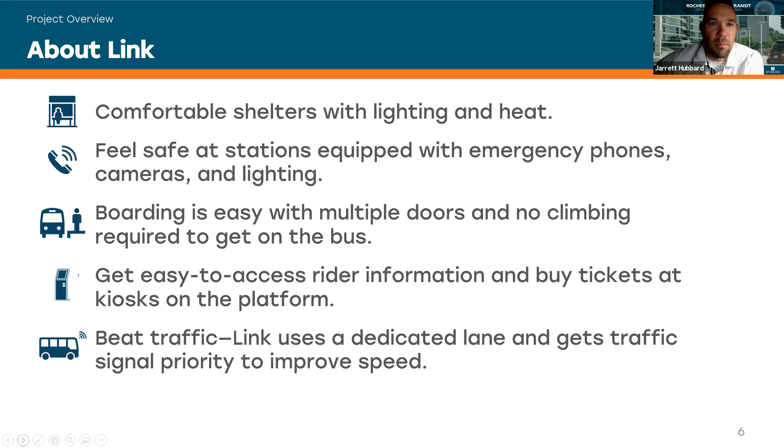Finally, Link Rapid Transit will use what's known as traffic signal priority, and that helps make sure we can meet those 5-minute arrival times and make the trip as quickly as possible from one end to the other.

In general, many of you have probably heard me present on where this project comes from, but it starts off with several years of work, really peaking with the DMC development plan in 2015, calling for us to expect a large increase in population and jobs, particularly downtown Rochester. To help accommodate that population and new jobs, we need to find ways to get people out of their individual cars and into other modes of transportation.

Beyond that, we're hoping to increase transportation options, reduce the amount of land and area in downtown consumed and utilized for parking and parking garages, and alleviate congestion. If we have all that growth, we wouldn't want all those people driving personal vehicles—it would be tough to get around downtown.

We need to prepare for that growth, and finally make sure that the quality of life downtown for residents, employees, and visitors is elevated without having to deal with too much traffic.

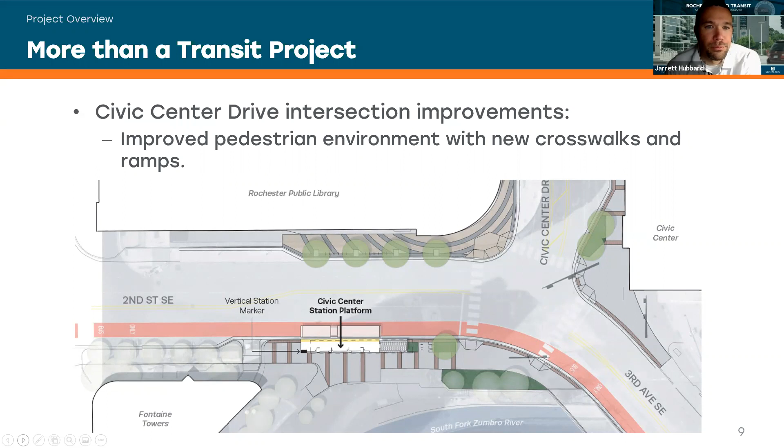Importantly, it's important to note that Link Rapid Transit is just one element of a larger plan that the city has, coming out of the city's comprehensive plan and transit plan, to increase transit across the city with similar BRT or bus rapid transit service that would be fast, frequent, and reliable.

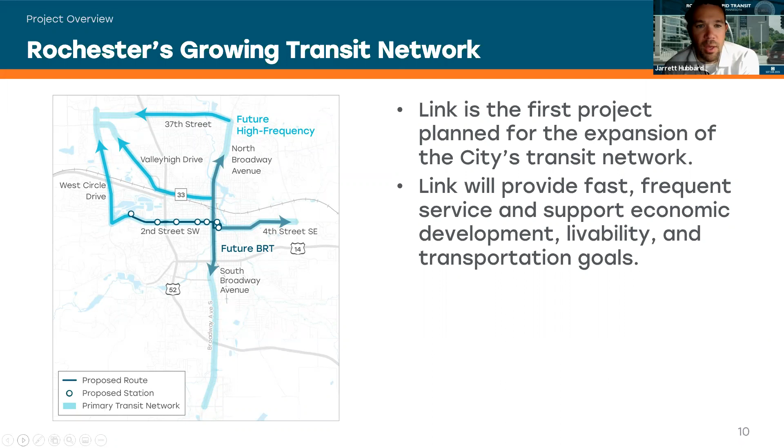The extension would continue. We hope to offer Link Rapid Transit service in the future along Broadway, north and south of town, and then out east, primarily along 4th Street. And then we'll look to go to the northwest as well.

Link Rapid Transit will utilize what is known as transit preference lanes, or business access and transit lanes, BAT for short. These transit lanes are meant to have buses be the preferred vehicles in them, and they will be marked as such, but it will still be permitted that if you're in your personal vehicle, you can make a right-hand turn out of those lanes to access side businesses, side streets, and driveways along 2nd Street.

The benefits of having these transit preferred lanes is it improves the reliability and speed of the bus. It minimizes the conflict between transit vehicles and other vehicles, and will hopefully make right-hand turns easier for everyone within the corridor.

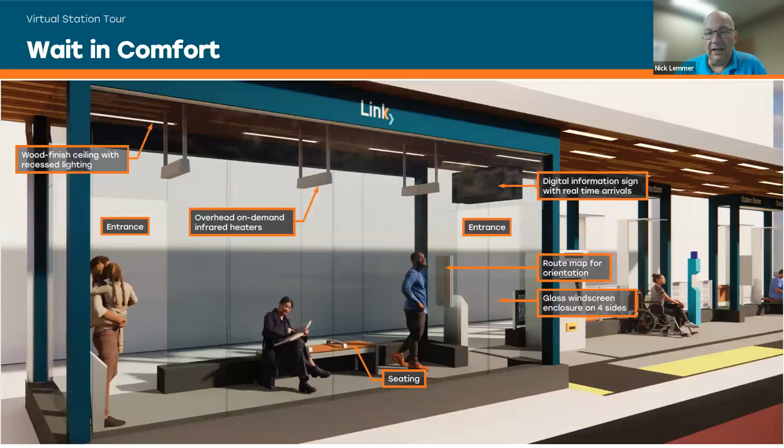The other thing is it's also an opportunity for us to really engage with the public. We've hosted 3 events so far at the station itself. We've toured a number of groups who've expressed interest in seeing the model, and dozens more individuals who happen to come by anytime and take a look for themselves. There's informational signage, so it's very much a self-guided tour. I'll skip ahead to show you some specifics.

In transit, which is my area of expertise, we're always competing for riders with the private vehicle. Some of the ways we do that is by offering exceptional service. We have to beat your own car in terms of comfort, convenience, reliability, and safety. We believe this station delivers on that.

What we're looking at here is what we're calling a climate protected enclosure that exists on each of the station model designs. The folks you see in this image are standing inside this enclosure, about 20 feet long and 8 feet deep. Some features include good lighting, like much of the platform. I should mention, there is a roof—even though our model didn't have one, there will be a roof on the entire station platform to protect it from the elements.

That roof will have plenty of lighting to make it a warm, inviting, bright, safe place for people to be. The enclosure has two entrances and exits, one on the left facing the back of the platform, one on the right looking down the platform toward oncoming vehicles. It'll have features like overhead on-demand heaters, seating for comfort, route maps to help you know where you're going, and digital real-time signage to help you understand when the next bus is arriving. Lots of features packed into this one climate protected enclosure.

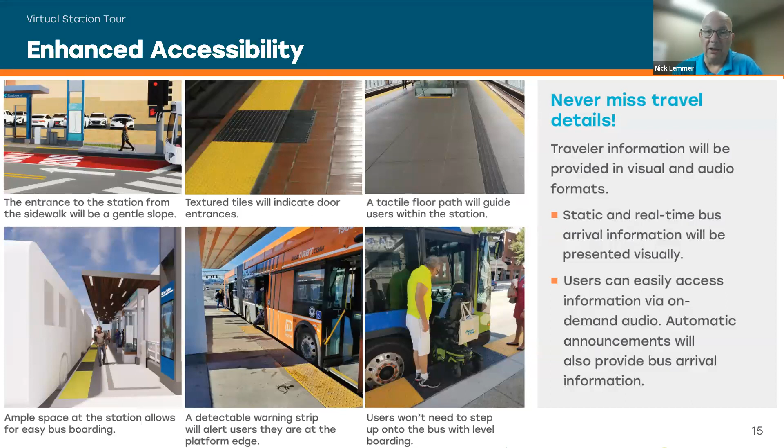So there are a lot of features to make sure that the things we value as America's City for Health are reflected in this game-changing amenity that will be coming our way in a couple of years. Let's go to the next slide.

I talked about the level boarding to provide accessibility for persons with disabilities or who use a mobility device. The other thing that level boarding surface does is allow for really fast boarding and alighting to the vehicle, along with 3 doors that all open at the same time.

And off-board fare payment, a characteristic Jarrett talked about early on. These factors all combine to make an experience that's very quick. We'll be able to get a lot of people on and off the bus without extending what we call dwell time at the station — the shorter amount of time a bus is waiting for people to board, so it can quickly get on its way and stay on time. That's what allows us to achieve those 5-minute headways I talked about.

The bus driver will have no responsibility for making sure people pay their fares. We'll leave that to another type of fare monitoring system, and just concentrate on making sure we can move people through downtown Rochester as quickly as possible. One of those ways you see illustrated here.

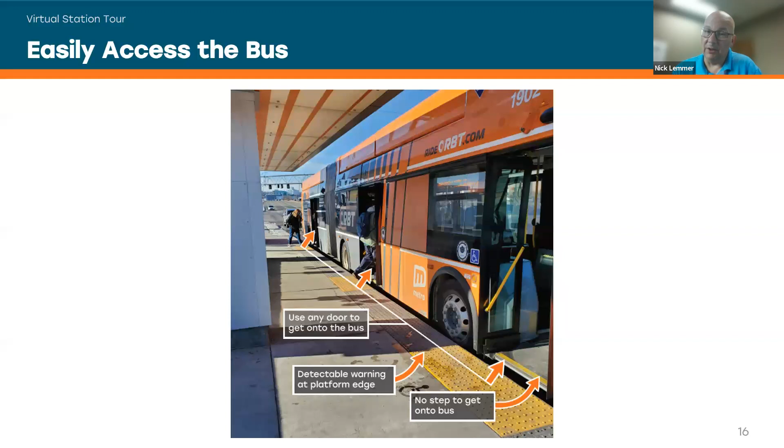Next slide, please. So I mentioned the co-designers earlier. This station model is more than just an example of what might come in the future — it's also a working prototype.

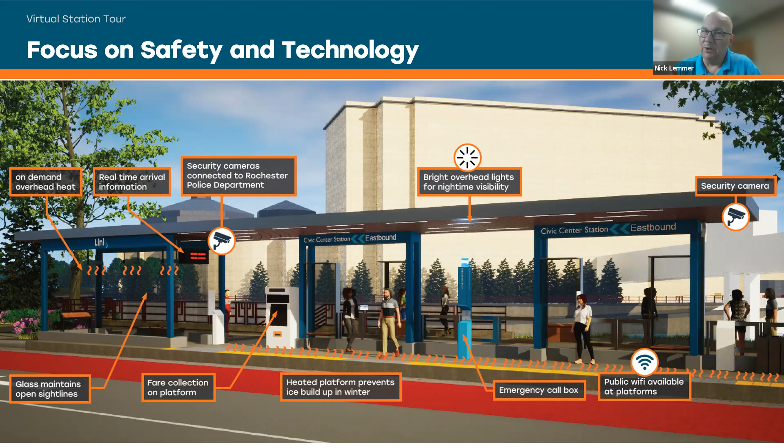Let's see, do I have one more slide, or are we on to Q&A? Let's see. Q&A, there we go.

Hopefully you guys have gotten a sense for the platform itself. I would be down there giving you a virtual tour. We tried it, but we just couldn't get the audio to be good enough, so we decided to keep it here in a more controlled setting and instead show some photos from the model. Again, Jared or anyone on the project team is happy to walk folks through it if you represent an organization who you think might be interested in seeing it. Or otherwise, we encourage you to go down there anytime you'd like to stop by yourself.

Jared, are we going to be open through the 15th of October? Is that correct? Let's just say the 8th for right now. The 8th, okay. Yeah, we've extended a week. We had planned on beginning decommissioning the station model at the end of this week, but we've extended it because we've had a lot of interest from groups touring the station.

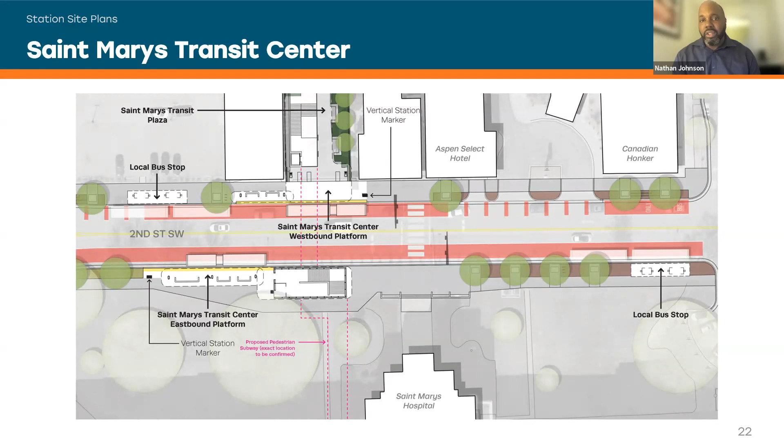These are 2 of 3 platforms that allow you to get into a climate controlled environment very quickly once you get off the bus. The other thing to mention about St. Mary's is that 2nd Street is being reconstructed from 18th to 11th, so it gives us a lot of opportunity to make improvements to support the station. The last thing on this site plan is that in addition to the rapid transit line, the Link, there are some accommodations for the local bus stop indicated on both ends of the station area.

The other station where we are providing a vertical access point is at 2nd Avenue, specifically at the Hilton building side, which is the eastbound platform. You'll see a much smaller vertical access enclosure than at St. Mary's. We had less room to work with, but we also recognize the need for people to want to get down and into the subway level at this location, so we provided that accommodation here.

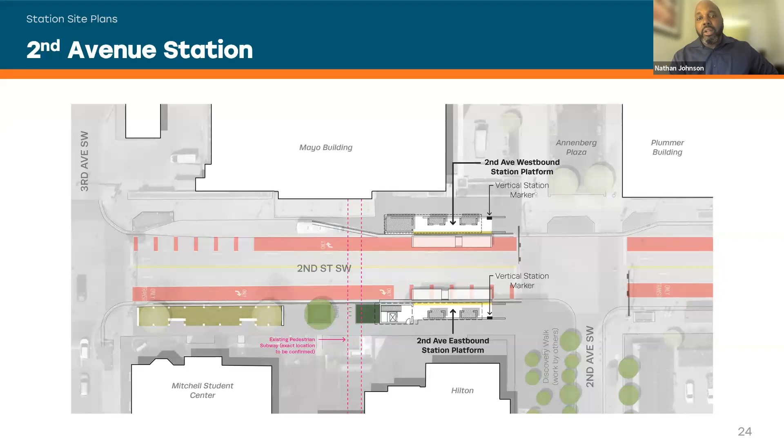This is one of the few, if not the only, station area that does not have far-side platforms on both sides. The platforms line up across 2nd Street from each other, but the south platform does have direct access into the subway. We also recognize that the 2nd Avenue station is probably the highest ridership station along with St. Mary's on the line, so this platform is a little bit wider. The model Nick described earlier has a 10-foot platform, but we increased the size to 13 feet at 2nd Avenue because of the high anticipated ridership.

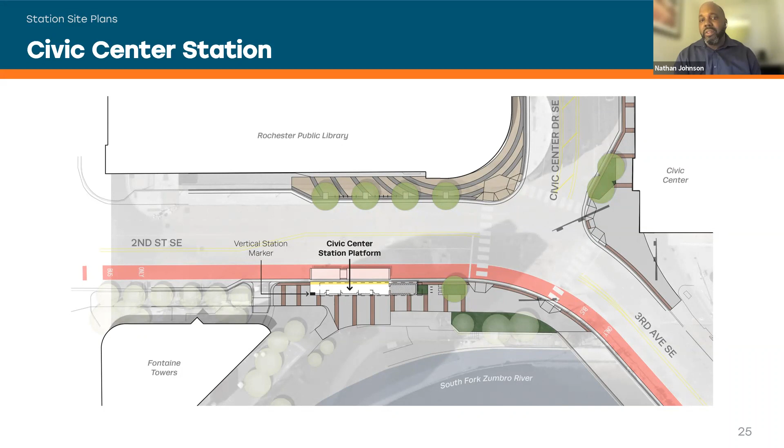The last station area we'll show is the Civic Center station platform. This is the prototypical station with the 8 by 20 foot shelter you can see on the right. This is where the bus starts to enter the loop, turning right and returning back before heading west again. There are some site improvements here to create strong connections down to the Riverwalk adjacent to this station, including urban design features and reworking of the roadway to make it a safer environment.

I believe that's the last slide, and I saw at least one question in the Q&A. Eileen asked about the station at 6th Avenue - yes, there is still a station planned and stop planned there. We didn't include it in today's presentation largely because the platform itself matches very closely to what you'll see in the model and at Civic Center, so there's not a lot of adjustments for that platform. The answer is yes, we still have 7 stops, and one of them is at 6th Avenue.

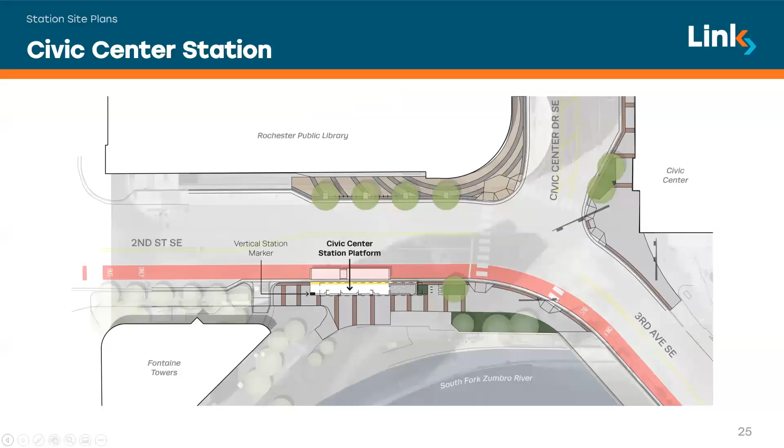Will it be on both sides of the street? I thought in West Transit it would just be the one. It will go into 19th Avenue and come back out.

Oh okay, the 19th Avenue had two. Yep. And then St. Mary's has two, 6th Avenue would have two. Correct. And then 2nd Avenue would have two. And then, for lack of a better word, I'll call it the library one, that would have one. So, 4, 8, okay. Yeah, because for some reason I lost the 2nd Avenue stop in the discussions.

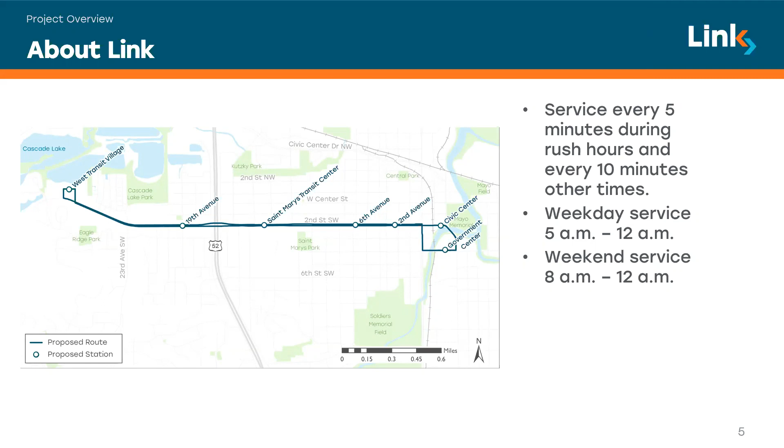I was just thinking 19th, St. Mary's, 6th, and then downtown. But okay, that makes sense. Yeah, it's a little difficult with the one-way around the library and the government center, so it took me a little bit of time to realize wait a second, it's not 14, it's a 10 or 11, and it's 11. Right, okay, that answers my question. Thank you. Yep, I always try to think of the convenience store 7-Eleven, that's how I remember it.